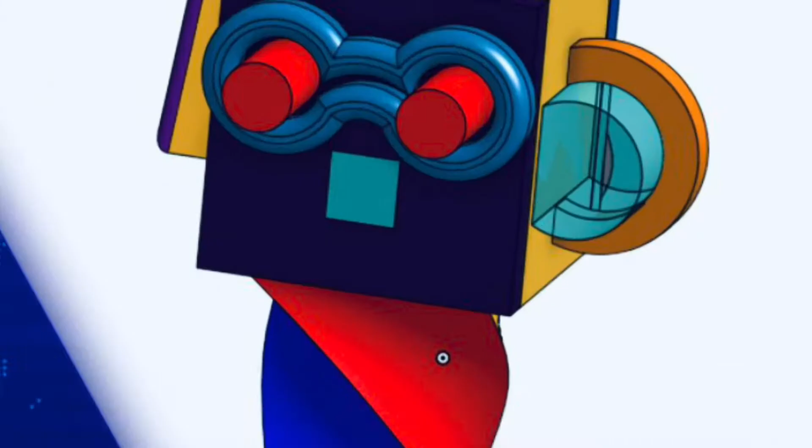Last one that I've got to do. Move this back down to where it should be. I like that a little bit better.

All right, I'm going to insert the glasses, my Onshape Fancy Cube glasses. Create a version. Create. Part Studio 1, and it doesn't matter where we put them because we're going to line everything up.

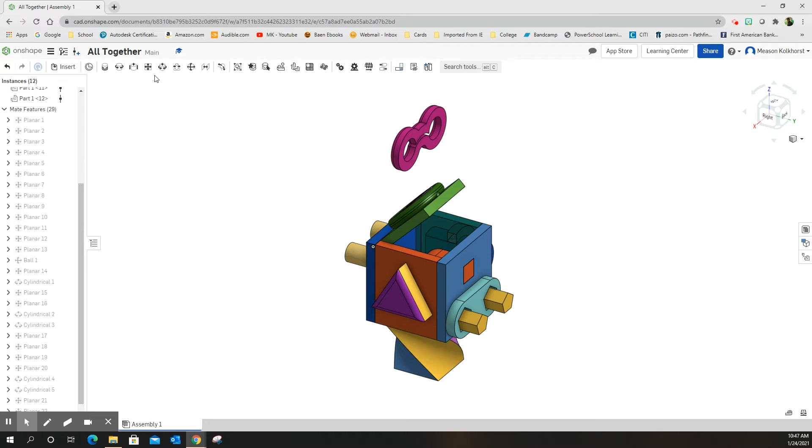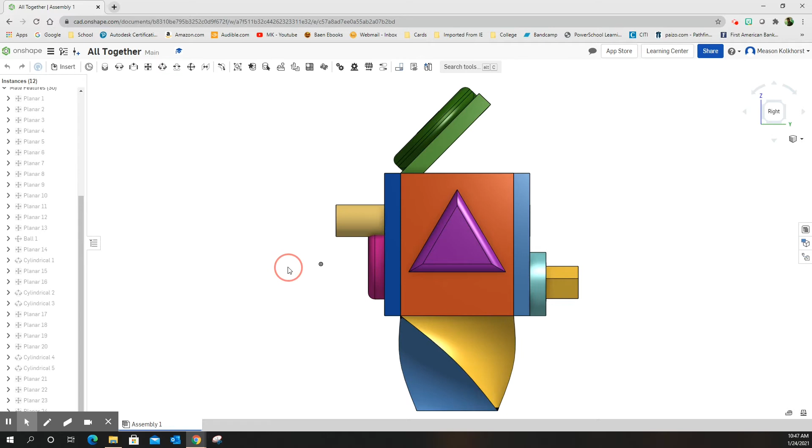Okay, so same as we did on the hexagon, we are going to planar mate the back of the glasses and the front of the front face so that they line up together. Again, if I go to the right side view, you can see that even if I try to pull it out here, they're flat against that front face.

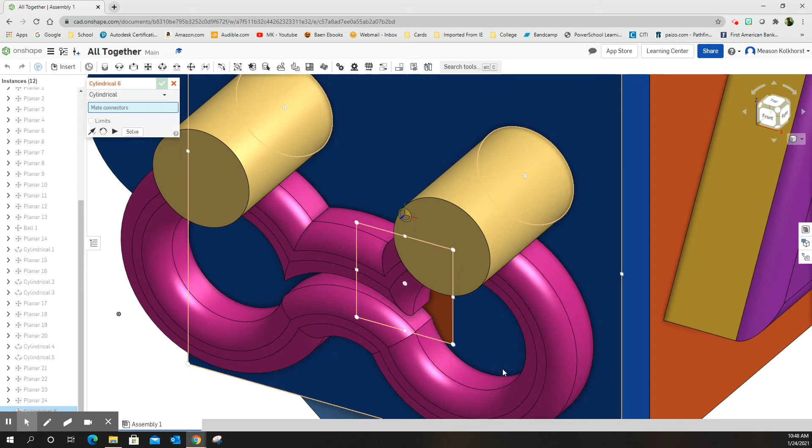Okay, we're going to use cylindrical mate, and the first one is going to be the cylindrical of... gosh, it's just a matter of moving it back. Oh, so close. You know what? I'm going to have to move this off so I can see what I'm doing, because it's grabbing too many other things. So let me move it down here, zoom out a little bit.

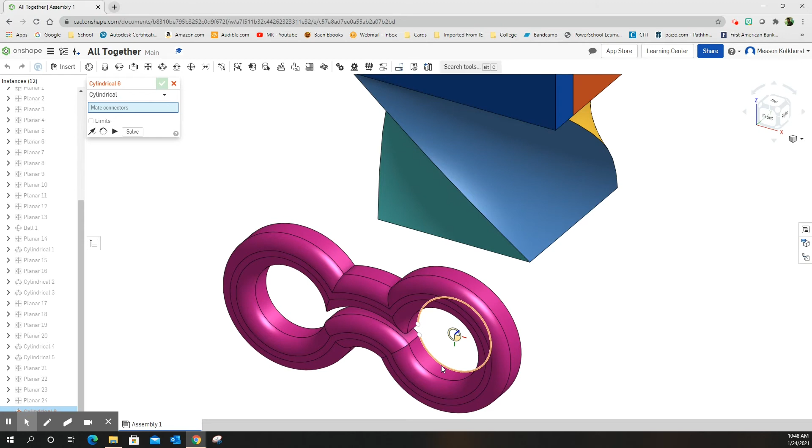All right, so cylindrical mate. Now, oh, look how much easier it is to grab that back circle. Back circle, we're going to come up here and we're going to grab the front circle. Green check mark, excellent. Back to isometric.

You'll notice that this one is now not connected, so I'm going to move him out, hopefully where I can get to him pretty easily.

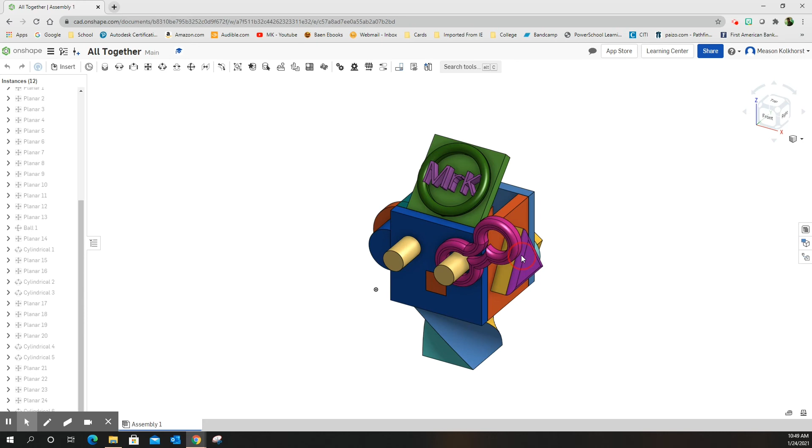Cylindrical mate, there it was, look at that. There it is, that center circle. So it's right there, that's the one I want. And this one here, green check mark, everything locks back in. If I grab him, he doesn't move around.

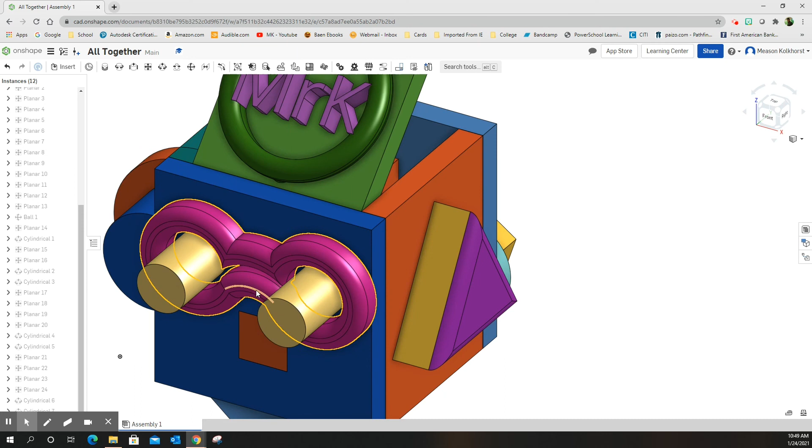And there you go, super simple. Once you learn the processes, it's pretty easy.